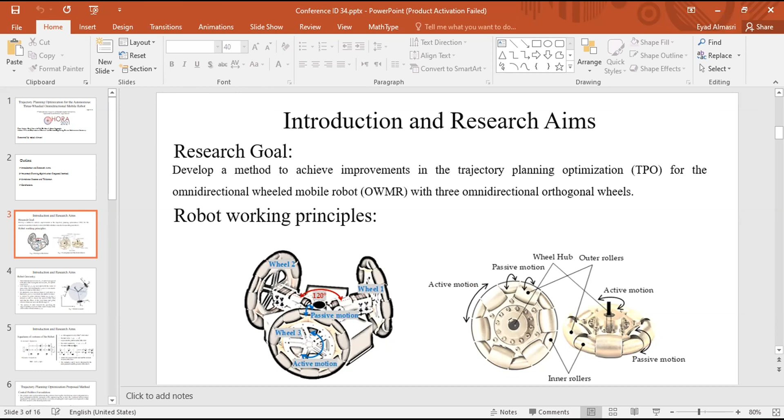Here let's talk a little bit about the robot geometry. The robot illustrated in this figure is equipped with 3 orthogonal wheels equally organized at 120 degrees on the boundary of the robot. 3 translational velocities, V1, V2 and V3, are applied to the 3 wheels along the directions D1, D2, and D3 respectively. The positive direction of rotation is considered as the rotation in the counterclockwise direction in this movement.

A local reference frame, OL, X sub L, and Y sub L, is defined to be associated with the center of mass of the robot. The X sub L here is coincident to the axis of rotation of the first wheel.

Those are coincident to each other. We actually attach a local reference frame to each wheel. To each wheel, we are attaching a reference frame as X1, Y1, X2, Y2, and X3, Y3, so that the X sub I or X sub J axis is coincident to the shaft of each wheel.

Moreover, a global reference frame, X sub F, Y sub F and O sub F, is defined in order to observe the motion of the robot, so that the X axis of the local reference frame, X sub L, and X sub F are associated with the angle theta, so that we can observe the position of the robot by using 3 parameters.

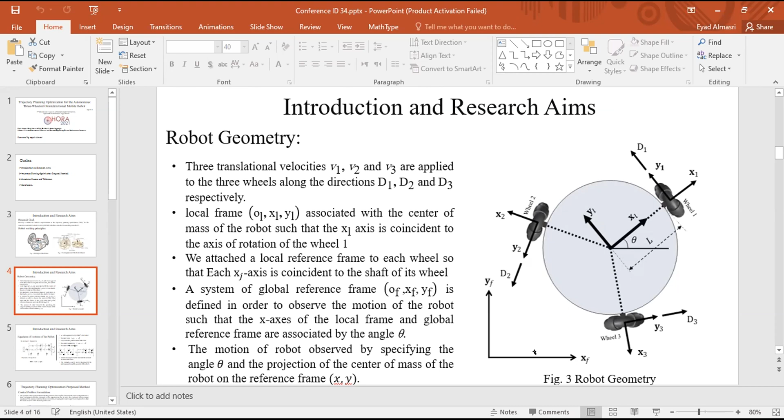Okay, let's move to the equation of motion of this robot. We have here the kinematic equation that demonstrates the relationship between the velocities of the center of mass and the angular velocities of the robot wheels. Here we have the dynamic equations, or the system of motion equations of this robot. Here all the parameters are defined. The matrices capital M, capital A, and capital Q are represented here.

And here U is the control input vector, where U sub I, or U1, U2, U3, are the voltage profiles applied to the I-th wheel DC motor. Here we have the state vector. It is just to localize the robot at any time by, as I mentioned before, X, Y, and the angle theta. Here M and J are respectively the mass and the moment of inertia of the robot.

Here also we have the constants alpha and beta that can be determined by the motor parameters and the geometry of the wheels. And I will talk about this model specifically in the next presentation, because I will talk about the model of this one.

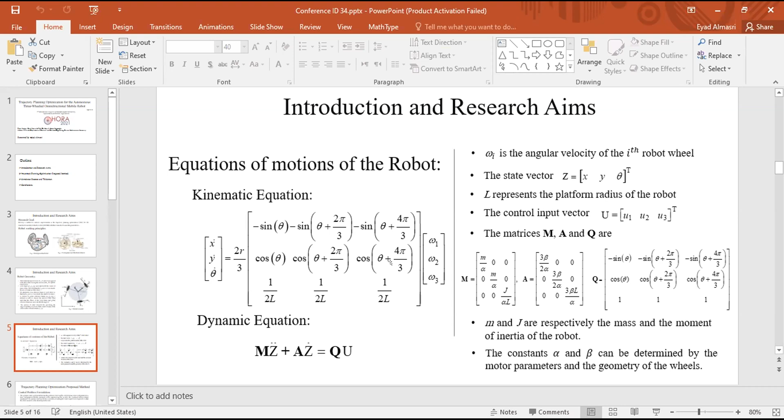Okay, now let's move to the proposed method of this paper. Here in this study, the trajectory planning optimization is formalized as an optimal control problem. The optimal control problem is defined as the problem of moving the robot from an initial configuration to a final configuration with the optimality of the maneuvering time TF. This is the total maneuvering time between the starting configuration and ending configuration while the constraint system of motion remains maintained.

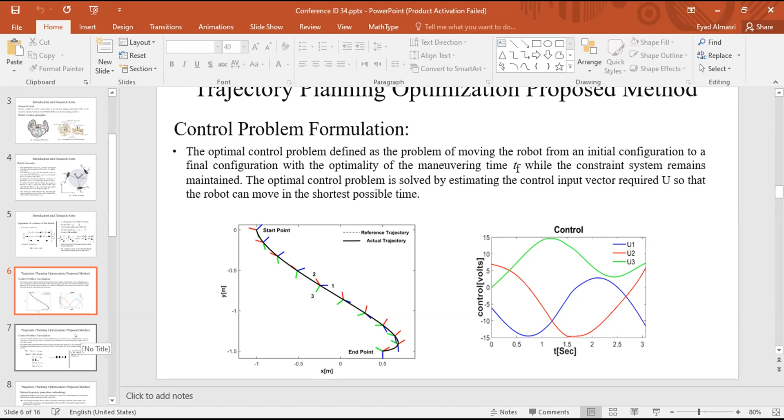The optimal control problem is solved by estimating the required control input vector capital U so that the robot can move in the shortest possible time. Here let's talk about the constraint system. Several constraints could be raised due to different reasons. However, in the robotics field two constraints have a special importance.

The first one is the constraint on the acceleration amplitude: x double dot squared plus y double dot squared should be less than alpha maximum. So this is the first constraint. The other one, which is very important, is that the control input of the DC motor of the robot wheels must be less than a specific value.

Okay, so the optimal control problem is formalized in this scope by relaxing the end condition. That means we only require that at the end of the trajectory the actual final position and velocity are close enough to the initially planned ending position and velocity. This closeness is formalized by E terminal.

Eyad, sorry for breaking, but please check the time, okay? Okay. Please check the time. The duration of the presentation is 10 minutes. Okay.

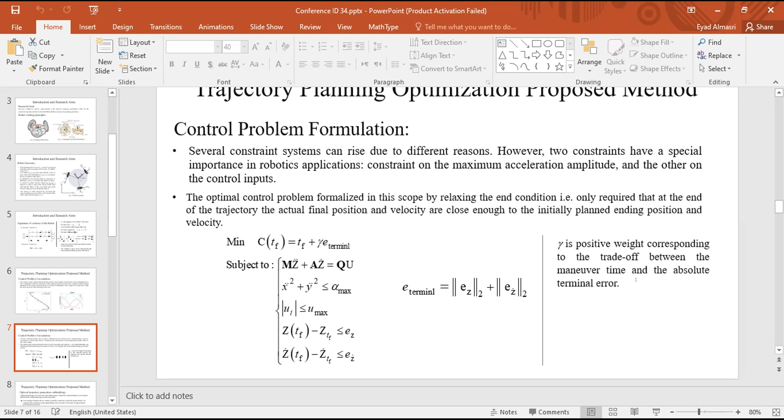Okay, here gamma is the positive weight corresponding to the trade-off between the maneuvering time and the terminal error. Now, just before explaining the proposed method specifically, of course we need a lower and upper bound for the free variable t sub f that should be identified to produce the feasible domain.

We will use these constraints to generate the TF lower bound. And the TF upper bound could be chosen based on experience of the robot and the workplace. Okay, here third order polynomials will be used to represent a simple reference trajectory that can be implemented for the four boundary conditions, two on the position and two regarding the velocity.

The terminal error computed by tracking the error along the trajectory. Here we have the error along the trajectory expressed as Z, which is the actual trajectory and the reference trajectory. And the difference between them is actually E of t. This is the error generated along the trajectory.

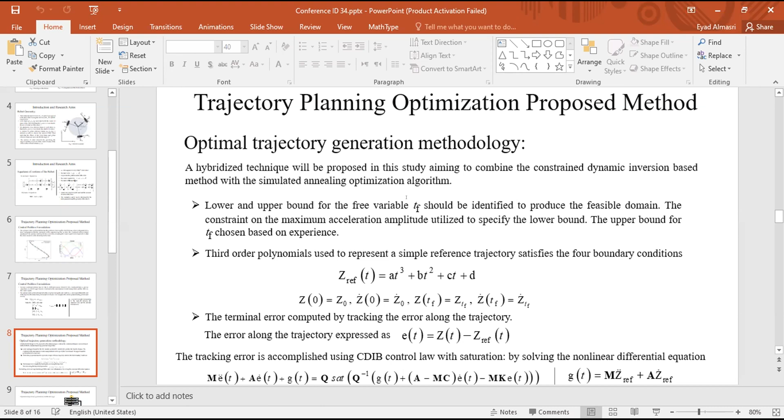How can we find this error using the constraint dynamic inversion based method? Actually, the tracking error is accomplished using a constraint dynamic inversion based control law with saturation, by solving this nonlinear, non-autonomous differential equation. So this equation must be calculated and solved each time we are considering a value of the free variable t sub f.

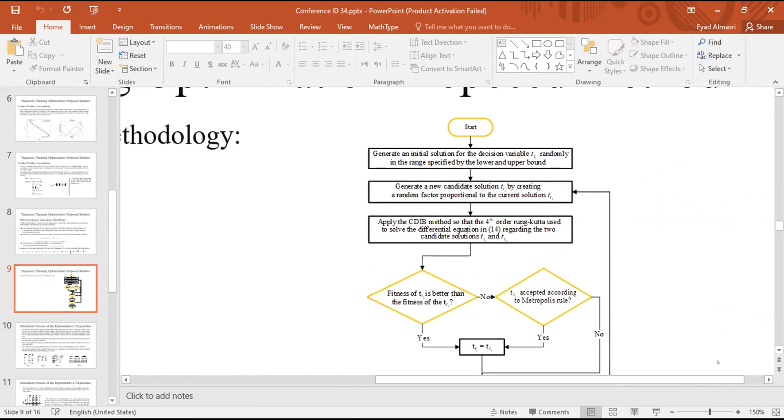Let's explain a little bit this flowchart. First, in order to find the optimal trajectory, we start by generating an initial solution for the decision variable t sub f randomly in the range specified by the lower and upper bound. Then we generate a new candidate solution by creating a random factor. Then we apply the constraint dynamic inversion based method, using the fourth order Runge-Kutta

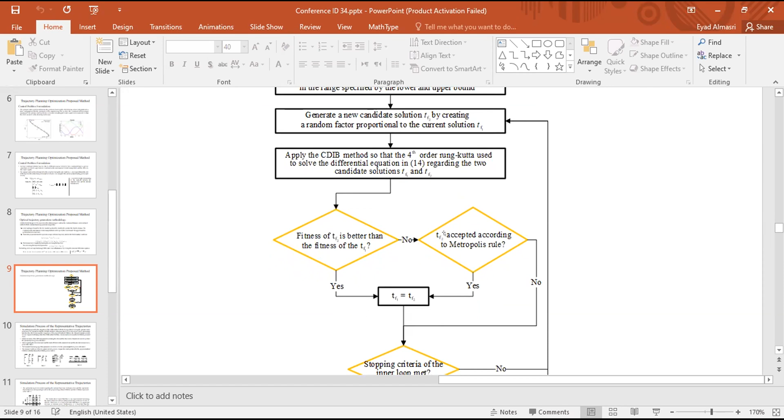to solve this one. Then if t sub f2 is better than t sub f1, we accept it; this is using the simulated annealing algorithm. Using this algorithm, it is possible to accept some non-validated solutions because we need to avoid finding the local optimal solution. So to avoid that, we can accept some bad solutions for t sub f. Then it is just a normal simulated annealing algorithm.

If the stopping criteria of the inner loop is met, we decrease the temperature. Then if the stopping criteria of the outer loop is met, we accept t sub f, which is the total maneuvering time. And based on this solution, we can calculate the vector U, which is the voltage profiles of the DC motors of the wheels.

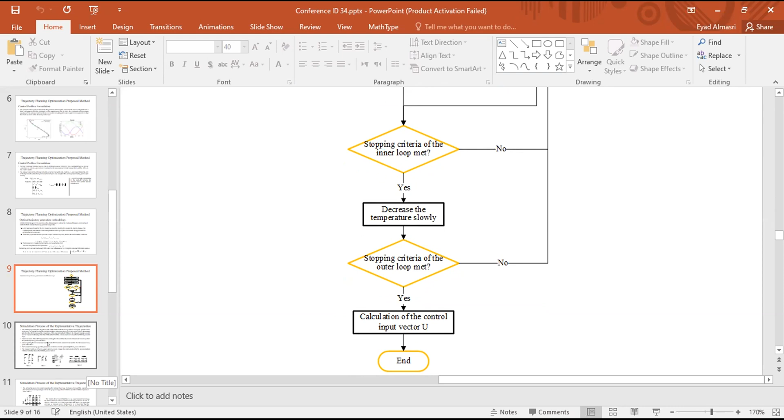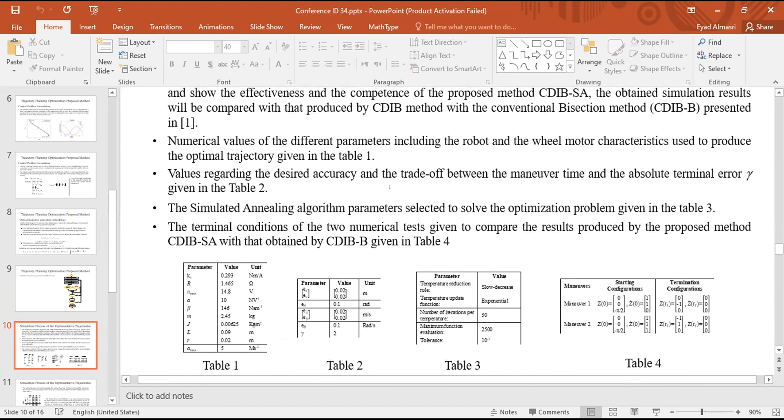Here we are talking about the numerical values of the experiments that we did. Here in table 4, here the starting and termination configuration, here the parameters of the simulated annealing, here is the acceptance error, and here are different parameters of the robot.

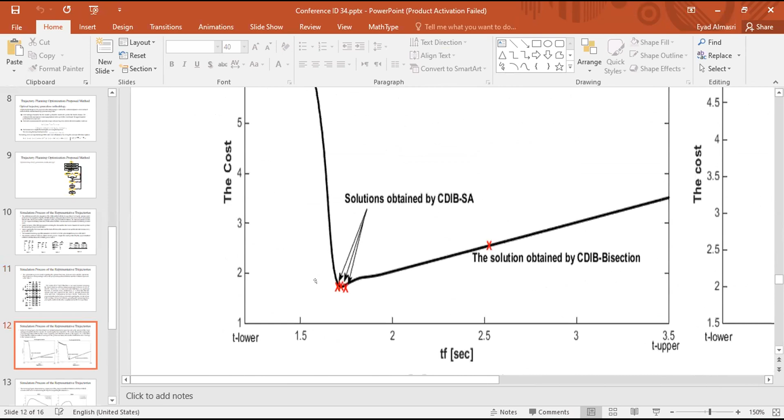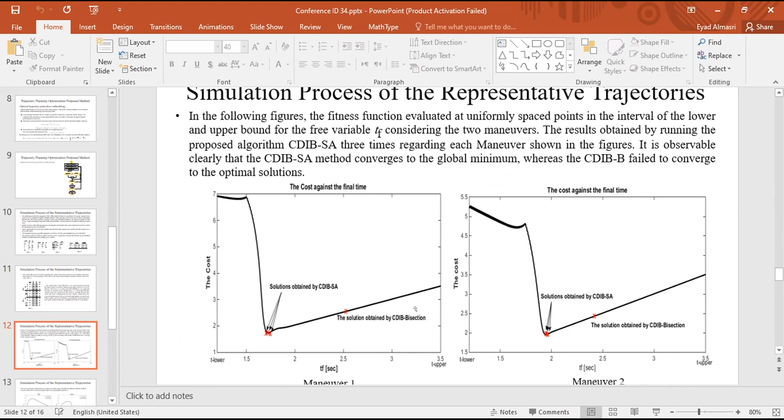Furthermore, it is observable that the optimal final time required for the robot navigation between the initial and final configuration becomes shorter. Let me show you: using our proposed method, we converge to the optimal solution, whereas the constraint dynamic inversion based with the bisection method failed to converge to the optimal solution.

Here is the tracking error using the original research, and here using our proposed method with constraint dynamic inversion based with the simulated annealing algorithm. As we can see, the error at the angle dropped from 0.1 radian, about 5 degrees, to less than 0.02 radian.

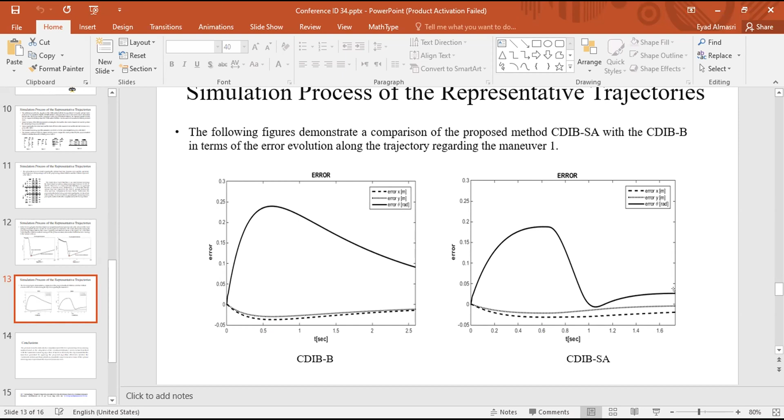As a conclusion, the present research established a computationally effective optimal trajectory planning method based on the integration of the constraint dynamic inversion based method with the simulated annealing algorithm. Experiments showed that the trajectory generated by the proposed algorithm effectively satisfies the system constraints and demonstrates a remarkable improvement in terms of the optimal traveling time and the terminal error, compared with the original research method of constraint dynamic inversion with the bisection method.

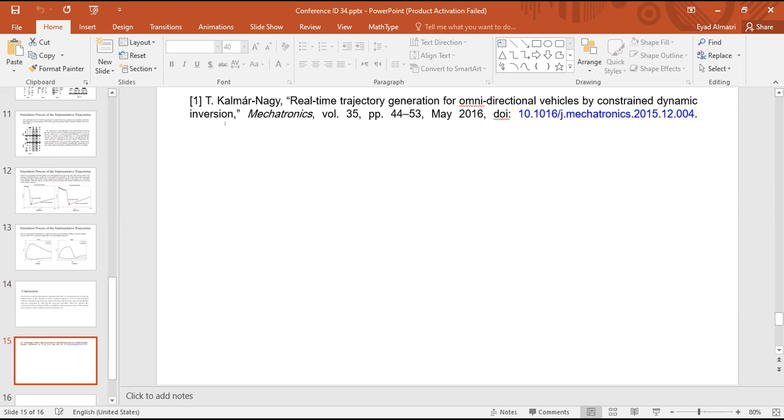I'm ready if there is any question. Thank you very much. Do you have any question, comment or remark? No question. Okay, then you can continue. Okay, let's continue with the other one. Okay, now I will share.

Okay, Hisham, so this is the second paper presentation. This presentation discusses the paper entitled Modeling and Optimal Motion Planning for the Omnidirectional Mobile Robot with 3 Orthogonal Wheels.

This presentation will be divided into 4 sections. The first will cover the introduction and research aim, and model analysis of the 3-wheeled omnidirectional mobile robot using the network model approach, discussed in section 2. Motion analysis using constraint dynamic inversion based simulated annealing method will be discussed in section 3. Conclusions and final words will be provided in the last section.

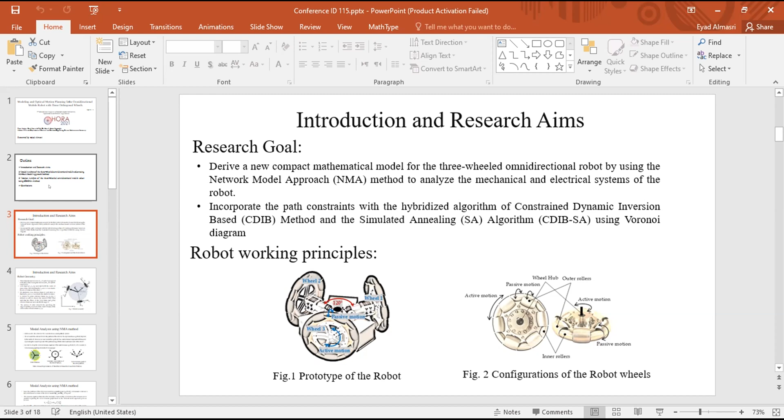Then the hybridized algorithm of constrained dynamic inversion based simulated annealing algorithm has been applied in collision-free motion planning by incorporating path constraints using the Voronoi diagram. This model was explained in the first presentation.

Now let's talk about the modeling of the robot. In this model, the robot is considered as a multi-rigid body system, because the network model approach is based on the multi-rigid body system. We model the robot as follows: the platform is represented as a rigid body depicted by the symbol R. We can consider the rigid body R as a multi-terminal component with 4 ports, representing the connection points of the platform along with the wheels and the mass center of the robot G.

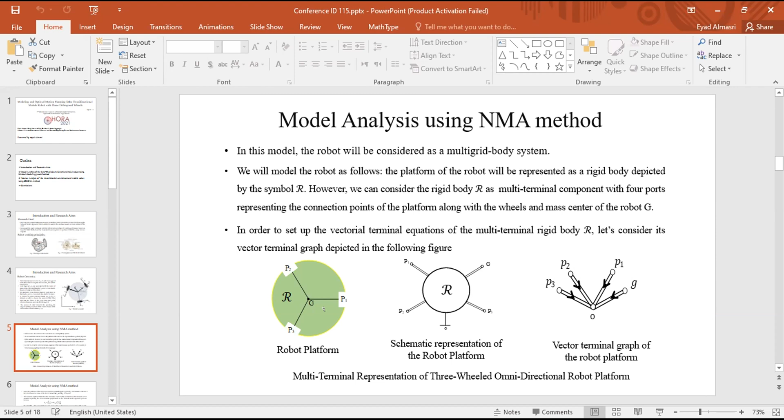In order to set up the vectorial terminal equation of the multi-terminal rigid body R, let's consider its vector terminal graph depicted in the following figure. Here is the vector terminal graph of the robot platform, and it can be seen: P1, P2, P3 are the connections with the wheels, and G is the connection with the mass center of gravity.

The terminal equation shows the kinematic relation that exists between the terminal across variables, regarding the vector terminal graph based on the network model approach, given as follows. We will use this to derive the kinematic equation of the robot platform.

Here we have the matrix K sub G Pi representing the kinematic relation between the terminal across variables of port P sub I and the terminal across variables of port G, expressed as follows, where I is the 3 by 3 identity matrix. The matrix R sub G Pi is the skew symmetric matrix representation of the vector R sub G Pi, which is the positional vector of point Pi relative to the reference.

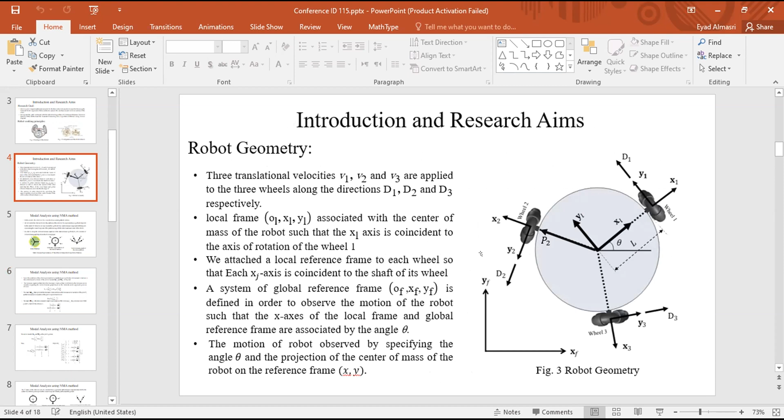This is, for example, P2 expressed in terms of the reference frame vector. The across variables V sub G and W sub G at port G are clear: V sub G is the linear velocity x prime, y prime, and W sub G is theta prime.

Then, by substituting R sub GP and this matrix into this equation, we can get V sub Pi and W sub Pi. Let's find the explicit form of this equation as the inverse Jacobian that relates the velocity of the center of mass to the velocity of the ports P1, P2, and P3. Now let's talk about the wheels, and how we can represent the wheel using the network model approach.

The wheel is depicted by the symbol W sub I with two ports, A sub I and P sub I, representing the connection points with the platform and the ground. I will do the same thing with the platform to get the relationship between port PI and port AI, using the same concept as the platform.

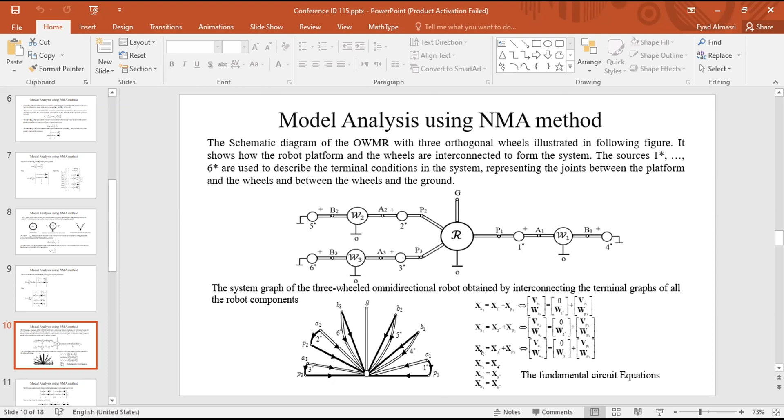Here we have the sources 1 star through 6 star, describing the terminal conditions in the system, representing the joints between the platform and the wheels, and between the wheels and the ground. Here is the system graph of the three-wheeled omnidirectional robot, and based on the system graph, we can very easily derive the fundamental circuit equations.

Based on the fundamental circuit equation, and the equation derived for the platform and for the wheel, we can get this equation based on the fundamental circuit equations. Then very easily we can isolate W sub AI, and it can be written in the expanded form.

Here's the kinematic relation that relates between the velocities, the angular velocities of the wheels, and the velocities of the center of mass of the robot. So by utilizing the Moore-Penrose pseudo-inverse of the Jacobian matrix shown in the following equation, this is the kinematic equation of the robot.

The force generated by the ith DC motor attached to the ith robot's wheel with no slip condition is represented in this equation.

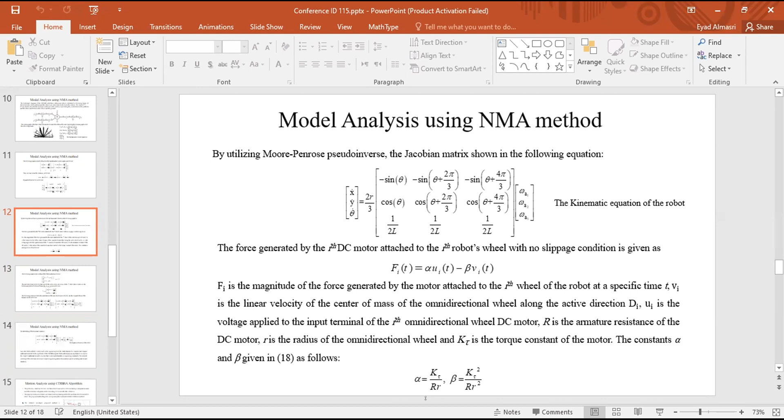Where alpha and beta are considered to be like this. This is the torque constant, and R is the armature resistance. Small r is the radius of the wheel.

This is based on the network model approach. We can get the dynamic equation of motion using the network model approach. Here, d sub i with respect to f is the vector that specifies the active drive direction of the i-th robot's wheel. It is represented here, and we can substitute it in this equation and write it in expanded form.

Here we can substitute the kinematic model derived in the first step to get the equation of motion, and then we get the equations of motion of the robot.

Since the network model approach is widely used in the engineering field, establishing a complete and compact mathematical model for the rigid bodies of the omnidirectional wheeled mobile robot using this approach plays an important role in expressing the complex mathematical model in a way more understandable to the engineering community. This network modeling may allow more complex engineering studies from multiple aspects, including stability and durability.

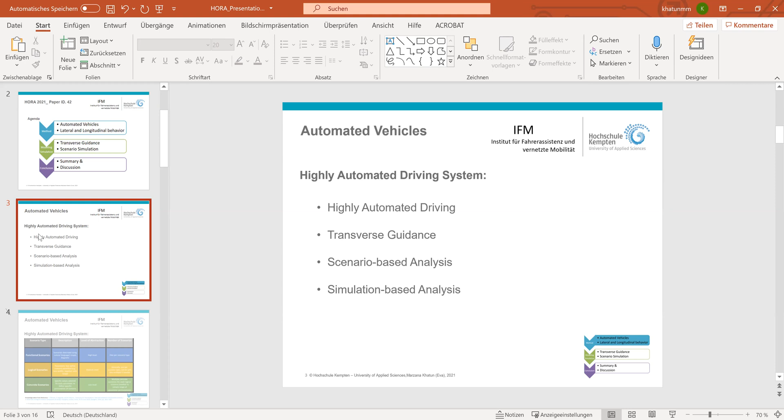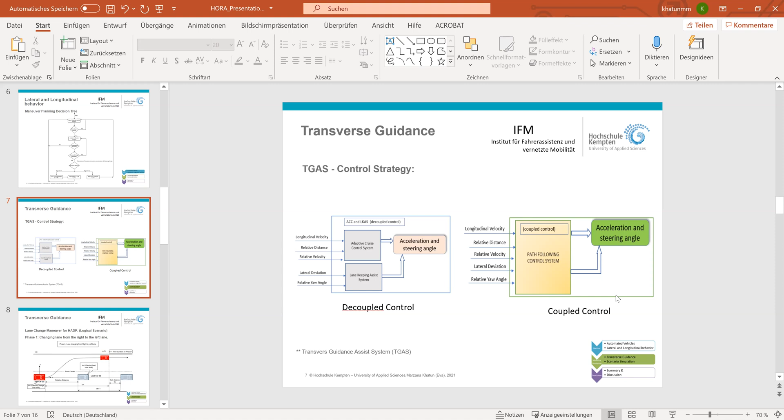To optimize which control strategy we could use for transverse guidance as a system, we did a short investigation on control strategy. We used decoupled control and coupled control, simulated them with our use case scenario, and realized that for our lane change scenario, coupled control is more stable. For further investigation, we considered a path following control system as coupled control for our use case scenario simulation.

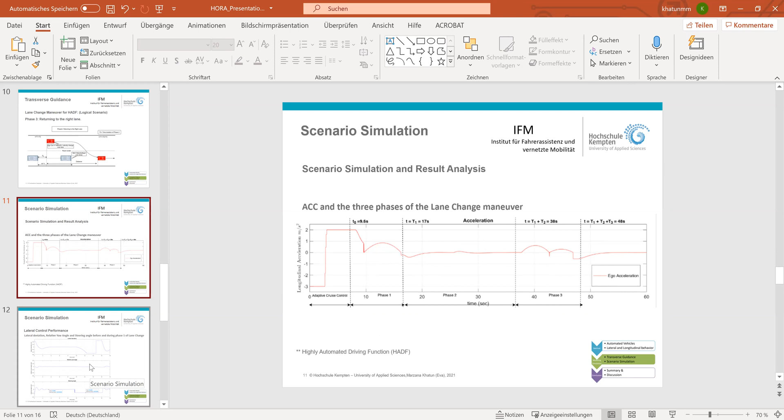Here I sum up the simulation result, and in this image, I'm only showing the longitudinal changes of the ego vehicle in three different phases. Phase 1 is the first lane change, and in phase 2 there was no lane change, so there was no higher peak in the acceleration. And then the last lane change is where the ego car is accelerated in the longitudinal direction.

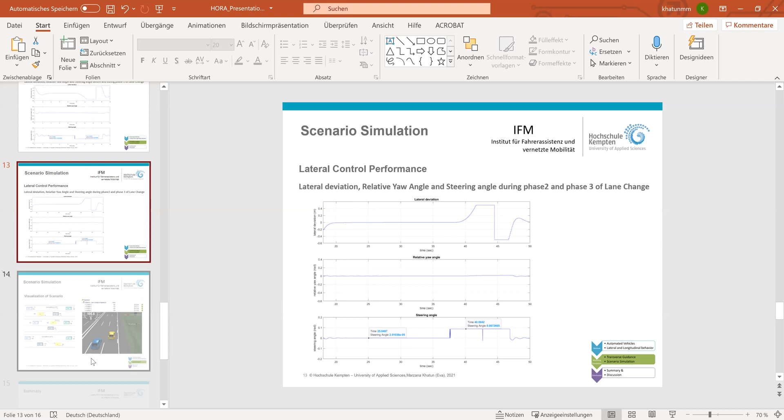As I mentioned, why we need this investigation, why we need to start from a basic use case scenario: the reason is that for autonomous vehicles, humans are always responsible for the function, which is nowadays quite common up to level 2 vehicles. Our focus is that for level 3 and higher, the vehicle itself can take its own decision when and how to drive.

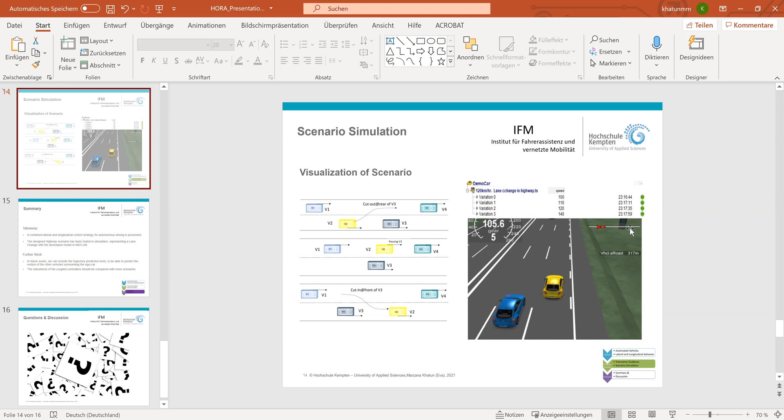With this motivation, we started. We take the results from the basic MATLAB simulation and try to implement them in tools like CarMaker. As you can see, I'm using the same scenario, varying the ego vehicle's parameters, and observing whether there is a chance of a collision or not.

And this use case scenario helped us also to realize how the vehicle behavior in general is affected when two different systems are working together. For example, adaptive cruise control, ACC, which only considers the longitudinal behavior, is not working exactly the same when we wanted to incorporate the lane keeping assist system together.

So that's the investigation we have done in this research topic, how we can combine several of these supporting assist systems that could lead us to an acceptable range to achieve level 3 functionality. As further work, we are still working with different complex scenarios, and that could be a highway with a construction site or heavy traffic.

And we are planning to incorporate working with two tools combined, like MATLAB with CarMaker, to get the final simulation and to observe how the parameters will be changed and how we can avoid collision in the transverse guidance assist system. I would say that's all from my side, and I'm open for any questions.